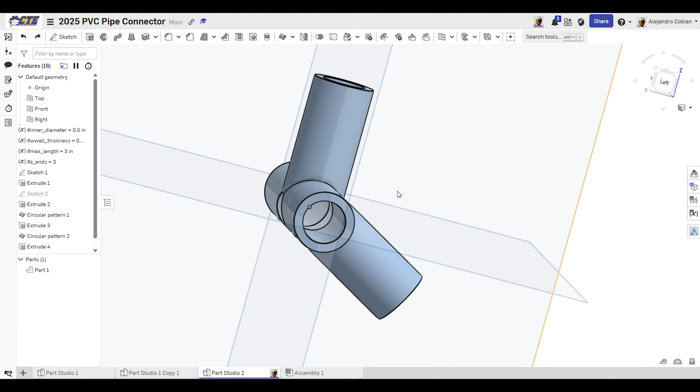So for this video, we're going to go ahead and create this PVC pipe connector. Right now I have an elbow. So if I do Control Z, we can see the changes that I made to create this. So we can also change these variables here to actually get a T connector. Or we can change it to get different ends. And it'll still be a smooth finish. So like if we do Control X or Shift X, we can see that we have a smooth interior. So let's go ahead and get started.

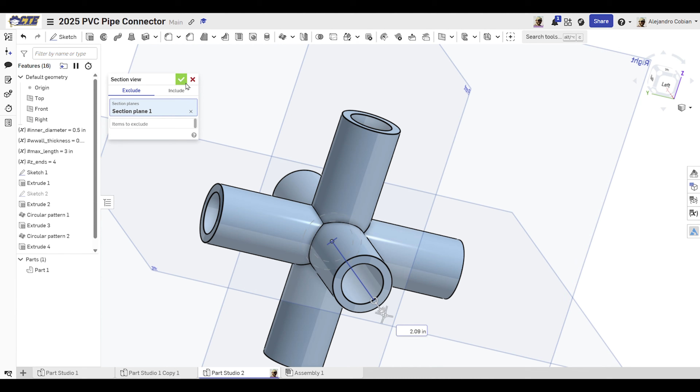So I'm going to create a new part. I want to start off by writing out my variables. So my inner diameter will have a value of 1. My wall thickness will have a value of 0.1. And by the way, I'm working in inches, so make sure you work in inches.

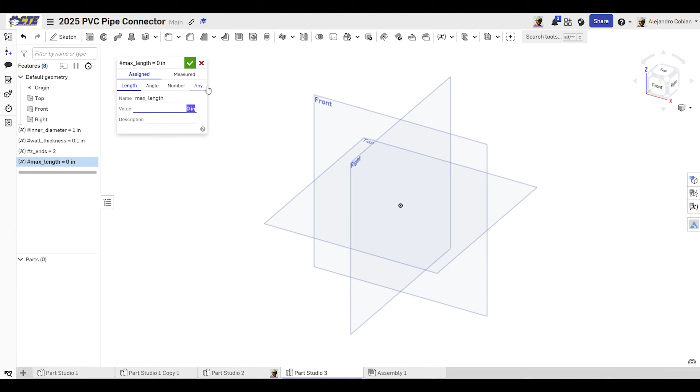My number of Z ends. This will be a number, so I'll put a value of 1 for now. Or let's do 2. And then my max length will be 3 inches. We're going on a right view. Let's go ahead and create a sketch. Let's create 2 circles centered at the origin.

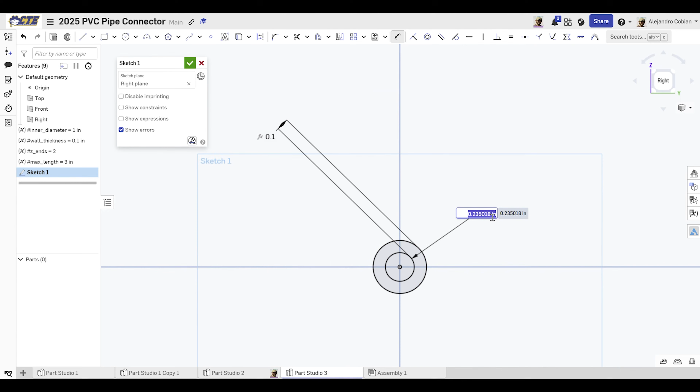Let's add the wall thickness first, and then the inner diameter, which has a value of 1 for now. Let's go ahead and extrude this. We're doing symmetric, and we're extending out with the max length. So notice I'm using my variable.

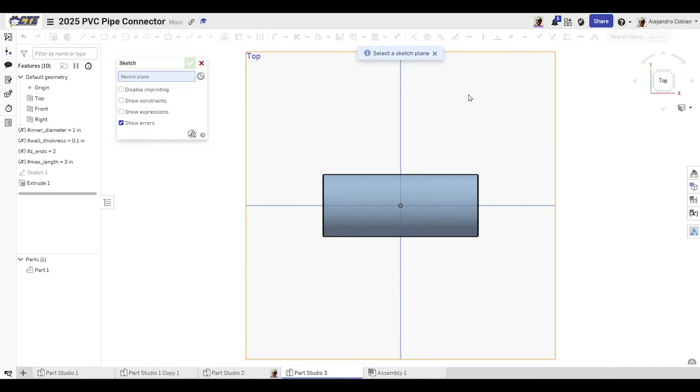So now I'm going to go on my top view. I'm going to create another sketch. We're doing 2 circles. Keep in mind we have to use the same dimension, and this is not centered, so let me make this coincidental. So right here, this is going to be the inner diameter. Oh, whoops, wall thickness. And now my inner diameter.

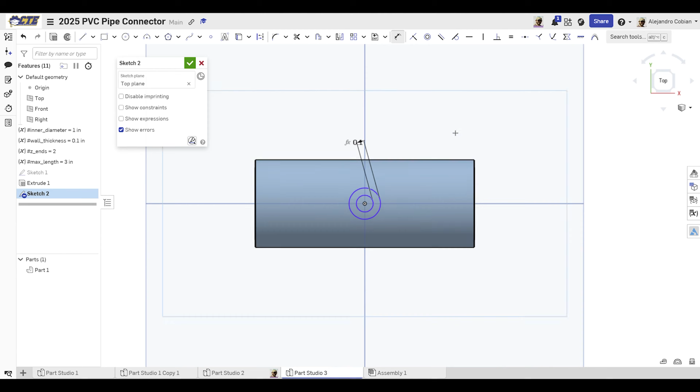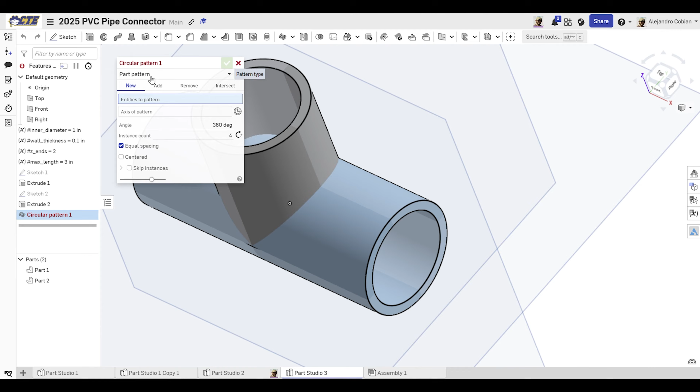Now I'm going to extrude, and I'm adding a new part. And I'm going to go out by the max length divided by 2, and I go ahead and accept. So now I'm going to use circular pattern, using part pattern. I'm creating an add. Axis is this one. We're doing our Z ends for the instance count, and we're merging with all, and go ahead and accept.

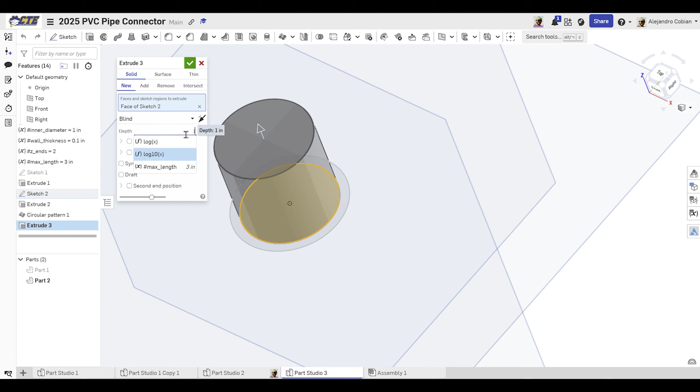So now let's hide this. And we're going to create another sketch, or we're going to do an extrusion using this inner circle right here. And we're going to do new. We're using our max length divided by 2. And now let's show our part.

We want to do a circular pattern, remove. Entities to pattern is this one, axis is this one. We're merging with all. And we want to do our number of Z ends to make sure this is smooth, and go ahead and accept. So if we do Shift X, we pretty much created that.

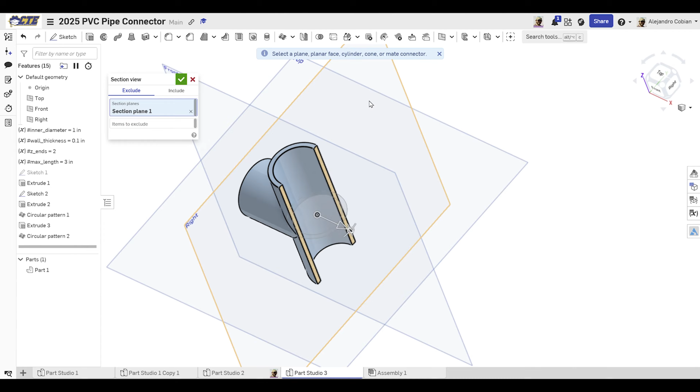So now we have to hollow this out. So let's go ahead and add one more extrusion. Let's hide this sketch, show this one, hide part 1. Select remove, through all, symmetric, and merge with all. And notice we have this hollow interior. And we accept.

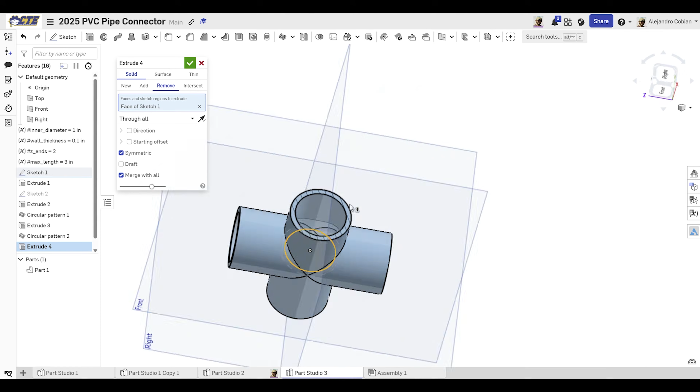So at this point, we can change our number of Z ends, and we have a pretty smooth finish at this point. So we're pretty much done. You can go ahead and play around with this and see what else you can create. So before we finish the video, try this out.

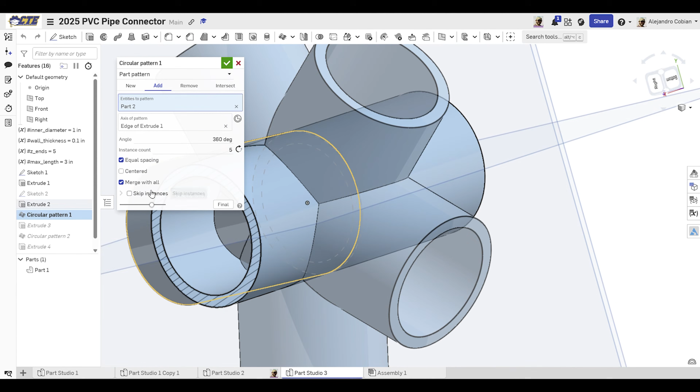So make sure you click on Skip Instances, select this part, and select any point here. And we keep the geometry, but we get rid of some of the entities that we replicated. So then we have this open part right here.

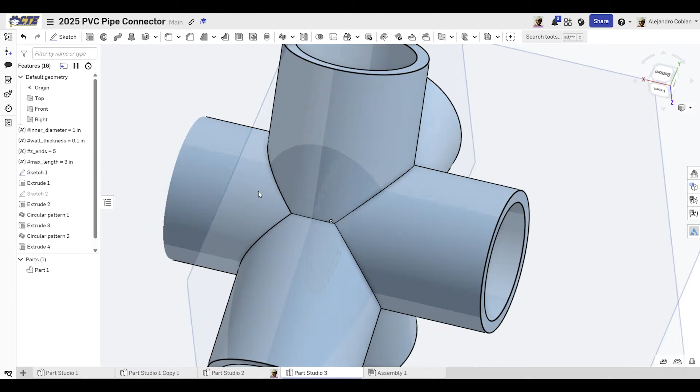So if we go to circular pattern again, we go to skip instances. And if we select this part, we get rid of that hollowed area. And if we accept, we end up with this geometry. So that's pretty much it.